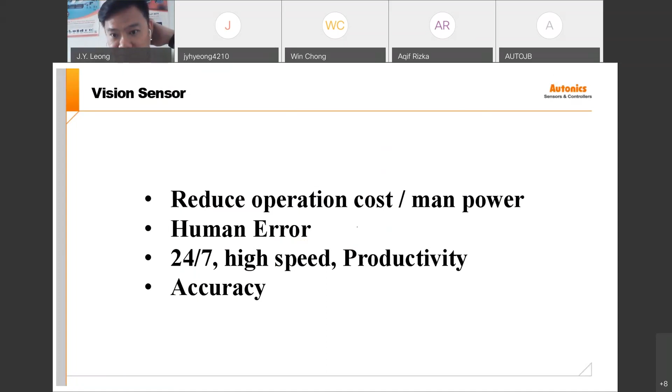Alright, so this is what we need to highlight - the purpose of the vision system. First, once we set up, a complex inspection process can be simplified - you only need to do the setup one time, then you can run it. The second will be precision inspection is possible.

Just now what I was saying, if let's say the object is very small and requires precision, you can also do it very well and get a very stable checking result. And reject can be reduced, of course, because of this high accuracy - that means you also can get very little reject.

And then cost saving, yeah, this is only one time - maybe today you purchase our VG sensor for maybe 6,000, then it's just a one-time payment that you can use. Okay, all right.

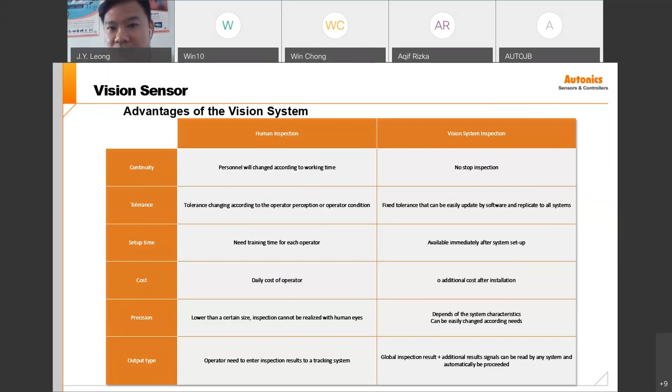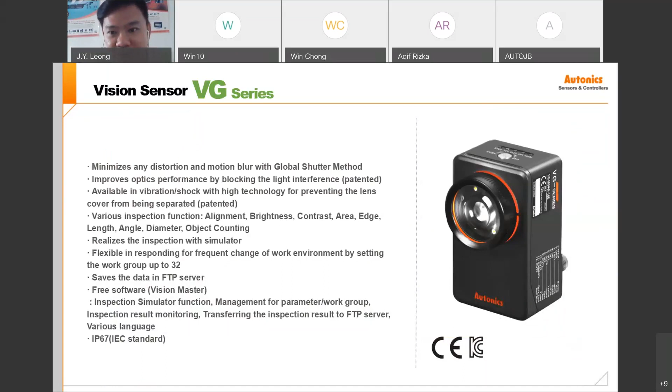Next we start to introduce our VG series. Mainly our VG series has two models - one is monochrome, this one is monochrome, and this one is color. It's easy to identify because the monochrome one has 9 inspection functions, and the color one has 12. The main difference is color differentiation - the function of color differentiation, or easier to say, is a color inspection system.

So we'll zoom in further. This is one of the on-site pictures for our VG-C series. For your information, our VG series has built-in lighting with this output, supporting both NPN and PNP transistor output, and you can set the trigger by sensor, by encoder, or continuous trigger. All of this is inside this unit - you don't need to assign another PLC to do the control.

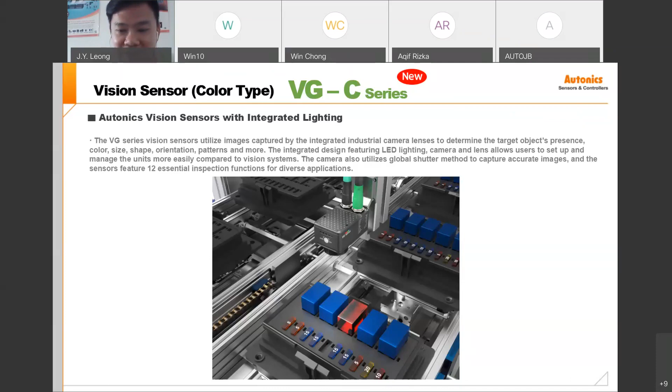Alright, let's look at our specifications in more detail. Our VG series is designed using a rolling shutter, not like previously the global shutters - sorry, had some mistake here. We are applying a global shutter, not rolling shutter. Sorry again, too fast, so there was some mistake here. Alright, we are using global shutter for our VG series.

Previously, the models we used had rolling shutter - if there's a fast moving object, there will be blur, which affects our inspection quality. So right now we are using global shutter, so for fast moving objects, there will be no blur. You can check this sample picture. Next is what we call work groups, or in words you're more familiar with, a recipe.

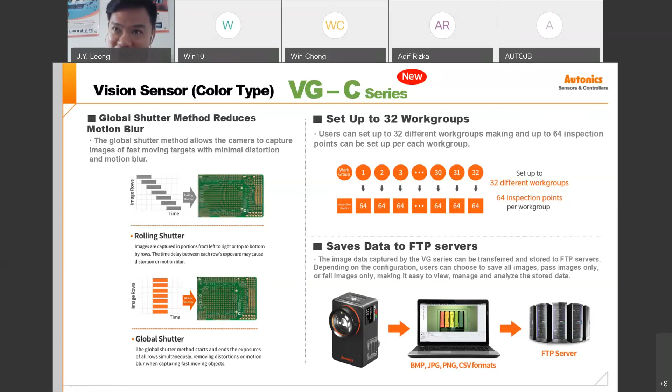So our VG series supports FTP server. So you can do some very simple minor setup and then you can transfer your data to the server. This is the function that I really like, because they can do a lot of things, like you can monitor the result, you can monitor the operator, you can monitor the production.

Okay, so we talk about the specification here. We have three focal lengths: 8mm lens, 16mm lens and 25mm lens. Of course, the working distance is totally different. Later on, I will share a very clear picture to show you the focal length, and how you do the selection between 8mm, 16mm, and 25mm.

Okay, so our power supply is 24 VDC, current consumption 1 ampere. So for the image element, we are using monochrome CMOS for the VG, and color CMOS for the VG-C, which is a color model. So the resolution here is 752 times 480 pixels, that's equal to 0.4 megapixel.

So the camera speed, camera frames per second, this is the camera capture speed, it's 60 frames per second. You may ask, what is the speed for your camera? I can only tell you it's 60 frames per second. But if you are applying checking criteria where the process speed is longer, then it will affect your checking time, total checking time.

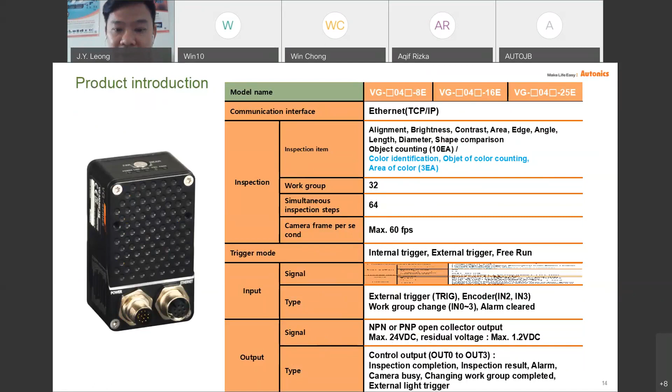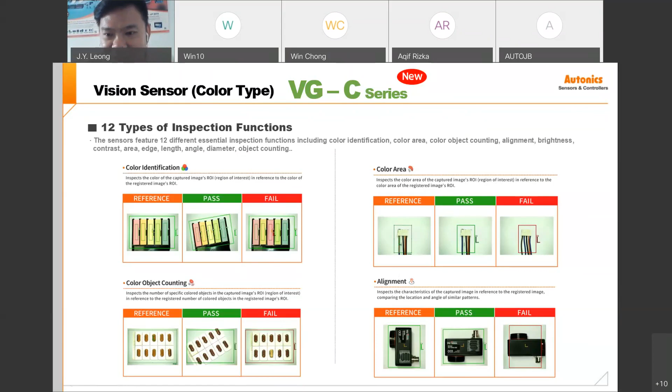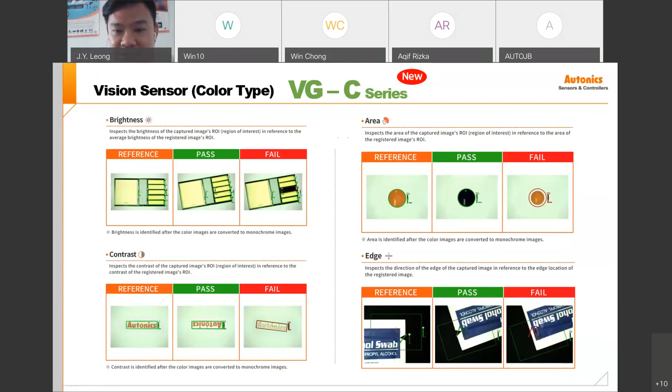So the diameter, of course this one is very straightforward - if the diameter is different, it will be triggered. And then this one is the length, you can see this so-called connector - if the connector is a different model, is short, it will trigger a fault signal.

And then this, if the pin is missing - or this function you can apply for those motor caps, is the cap sitting properly, it also can be detected. And then the last one is object counting without the colors.

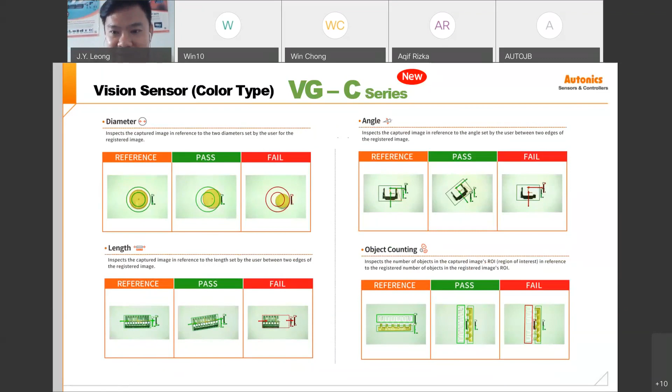So this next is I'll touch a bit on our Vision Master, our checking and setting software. This software, I would like to highlight, is free. You can download it from our website, and then it will automatically update. Even though you don't buy our VG series, you do have access.

They have one simulation at the right hand side, and then if you connect with our unit, it will be complete - complete for, like, you want to do the imaging setting, you want to do the output setting, or so on. So later on, Mr. Shahidan will explain more in details.

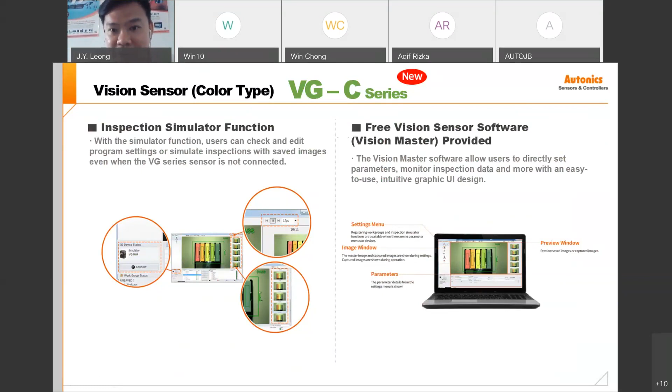So yeah, of course we have this filter also. This filter is majority for some special application. I want to highlight, if you have a very high reflection object, you can apply the polarizer filter to cut out the reflection, then you can get a much better, stable inspection result.

And then for the protecting structure, it's IP67 - that means it's weatherproof, dustproof. Right, so this is sharing some of this application for our VG series.

So for the food industry, if the seal is not good, that's detected, and the bottom side checks the expiry date. For automotive industry, the right-hand side shows the fuse box example I shared earlier. If you insert the wrong fuse, it will trigger a reject, saying the fuse setting is not correct.

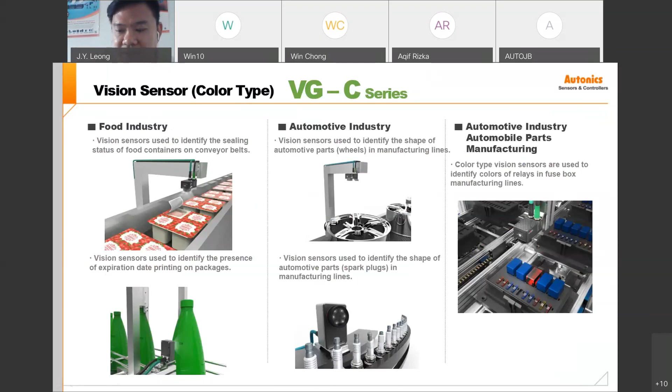For pharma, we also can do inspection because some pharma applications have special requirements, like checking water or medicine levels. This one on the right-hand side is the same for the medical equipment industry.

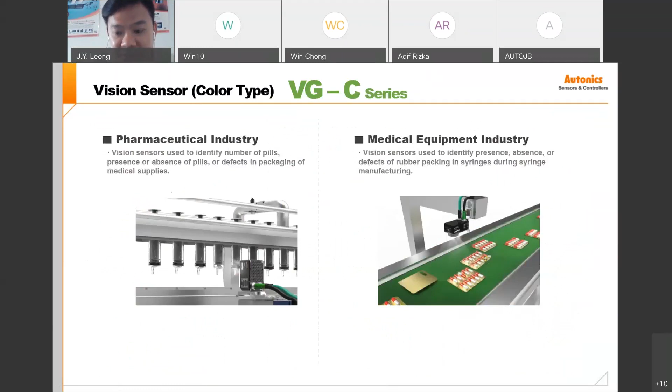All right, so I'll have a quick view of our Vision Master before we go to our successful story sharing.

This is our initial screen for Vision Master, a very user-friendly software. You just plug your cable into the PC, turn on the software, and it will automatically link out. When it links out, you just press OK. After that, if you want to change the IP, that's also fine, or you can go directly to setup.

This is the simulation for our software. Every time a new user installs this software, this is the simulation we provide, so you can go through the module, toolbar, setup menu, image window, and so on.

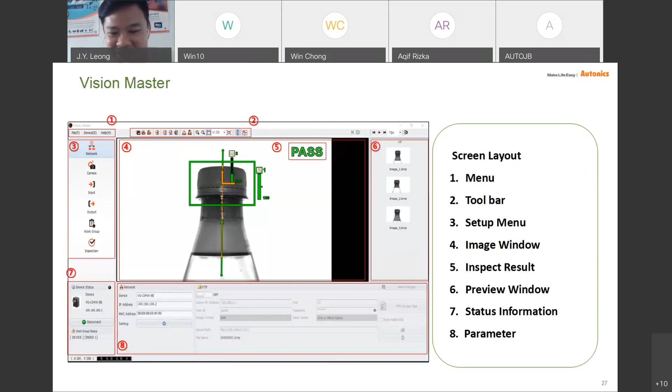So this is our step-by-step process, let me explain in more detail. First, you connect with the network. Then next, you do the camera setup to get a very clear and sharp image for teaching or setup use.

Then next, you do the I/O setup - is it NPN or PNP? I'd like to highlight, if there are 4 outputs, number 1 and number 2 are NPN, number 3 and number 4 are PNP. We cannot mix them - if it's PNP it must stay PNP, if NPN it must stay NPN, for both output and input.

Number 4 is our workgroup setup. Of course, you need to do the inspection criteria setup, and then after that you need to set for this.

Maybe you have four outputs and you want to separate them - reject 1 and 2 could go to output number 1, reject 4 and 5 could go to output number 2. You can configure it like that. After that, you just click start, run, and then we can do the inspection work already.

So here is our section for successful story sharing. I will share 3 of our successful stories here. Everybody hold on.

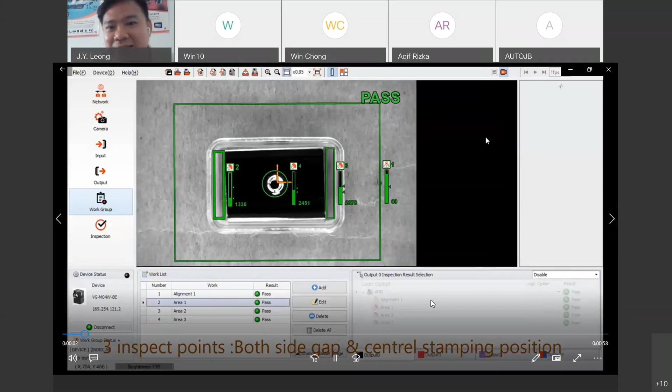Next, this one is the stamping. You can see right now the middle one is double stamped already, and this metal plate seating is not even, so it will trigger a fail.

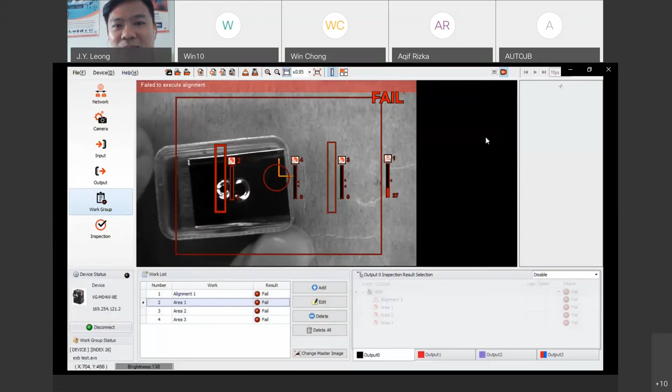So next I'll change to another one. Oh, this one is worse - the seating is totally out. You can see it triggers a fail. All right, so next.

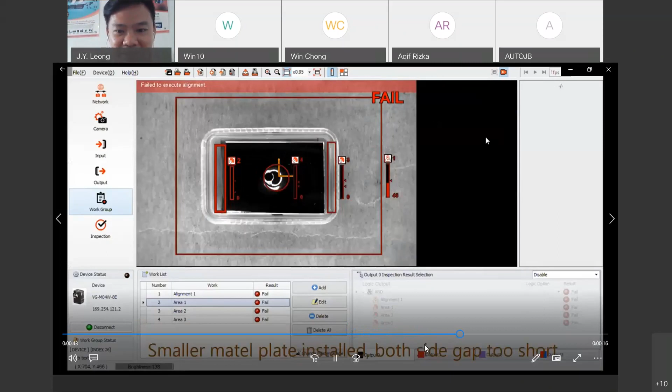Okay, this one is double stamping at the middle, and then this metal plate is totally very small. Left and right, the gap is not the actual size. So at last I put back the original one, the okay one, and then yeah, there's a pass.

All right, the next video has no sound, only my sound explanation. This is I think very familiar to all of you. This one is a SAJ project, this one is the meter. The customer would like to do this alignment. This alignment, not three is okay, but must be in one line. But if let's say it's 4 3 3, okay, 3 3 3 4, okay. Let us see.

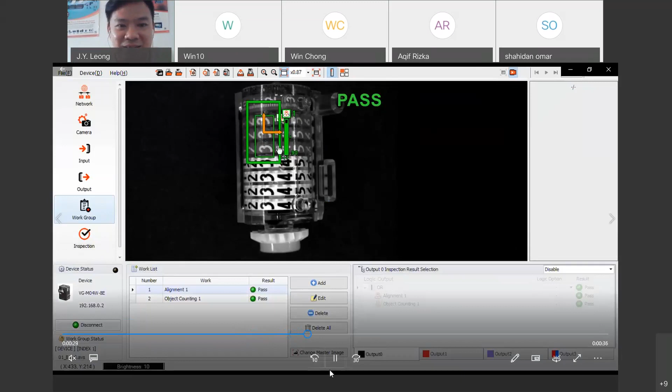So this one, unfortunately, I do it by hand. This is a testing on site, so we don't have the proper tools to turn. Later on, I just turn with my hand manually. Okay, so now it's misalignment already, so it will trigger fail. And then 3 4 4 3 3 4 is also okay.

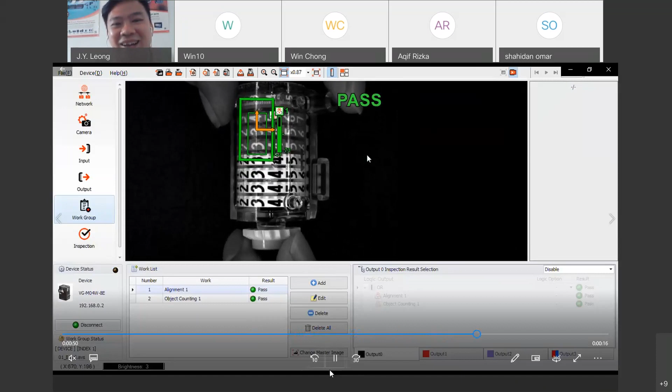Okay, thank you. Thank you.

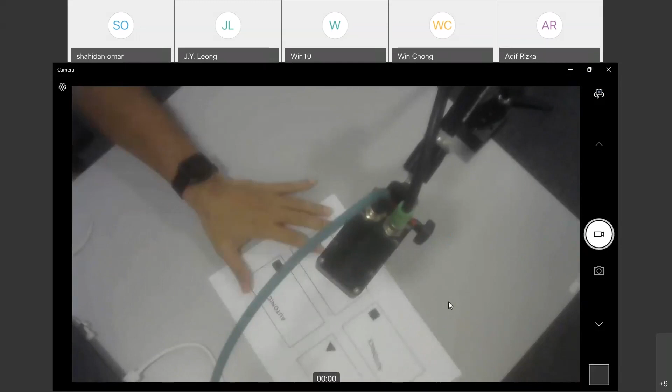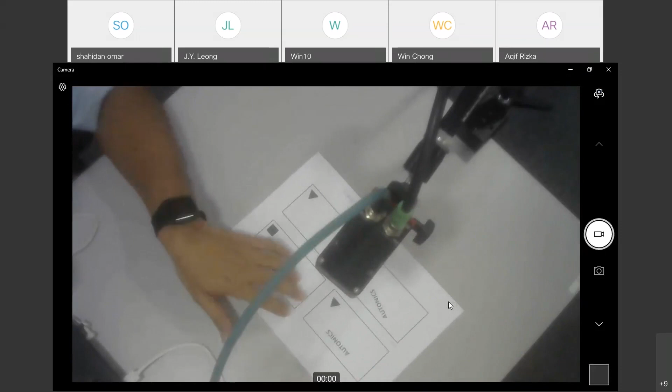Okay, I just install the vision sensor to detect this paper, white paper. So on the paper there's a simulation inspection product. Okay, so this one is an Ethernet cable which I use to communicate with my PC, and then this one is a power supply for the vision sensor.

Okay, now I stop sharing my installation method. So actually from the paper to the vision sensor, I install around 200 mm, 200 mm. So you can get the field of view that Mr. Jawad already explained, which is 100 mm wide width, and then the height is around 70 mm.

Okay, now I will share with you our vision sensor. Okay, everyone can see the vision sensor. Just type 1 in the chat box. Okay, thank you.

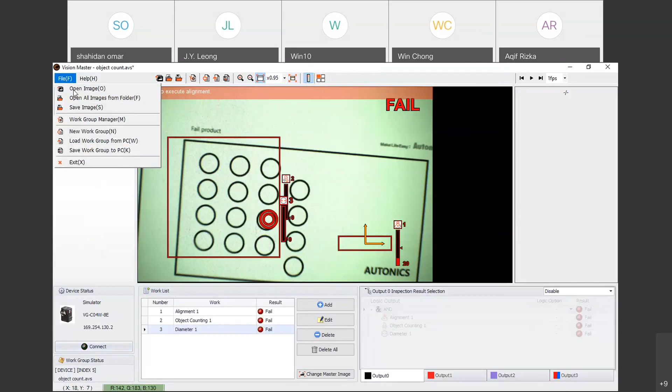Now we continue to show our vision sensor. Okay, first I disconnect this one. Okay, and then I connect back. Okay, this window will pop up that shows my computer already detected this part number, this version of the VG sensor.

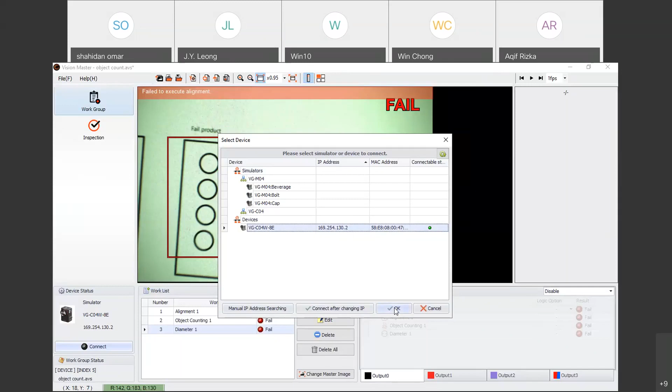So now for my demo, I use VG-C04W-8E. C is a color type vision sensor. So if mono, it starts with -M. Okay, you can see the IP address is already automatically assigned for you. After that, you just click OK. Okay, you can see this green button means the connection already succeeded.

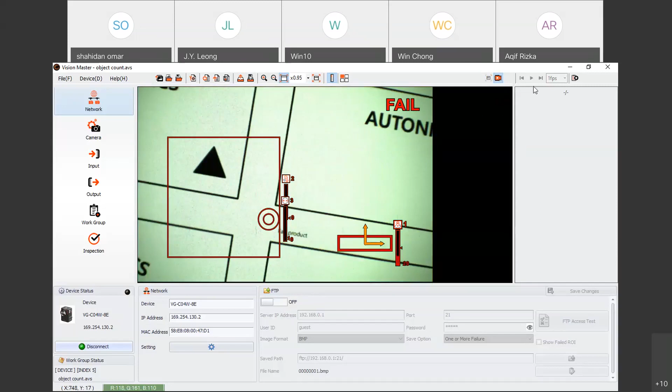Okay, after that, this one is a continuous snap. So if you want simulation or to do a demo, you can turn on this function, continuous snap. I try to move this simulation inspection paper to the center.

Okay, let me explain these features of our vision sensor. Now you can click, you see when you click this file, you can see the open image option. This means by offline testing you can inspect from the picture that you have already taken. So you can select the picture and then do inspection offline.

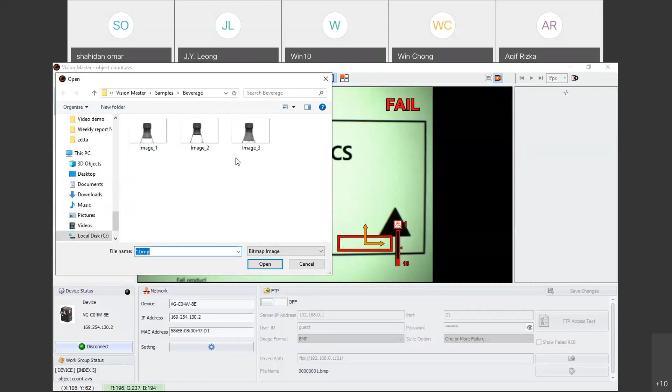After that, you can create a new work group, and also you can load the work group from the PC. Let's say you have already saved your setting, and the device is not enough, only supports 32 recipes. You can save the work group inside your PC as well. This function, in case you have more than 32 work groups, you can call the work group from your PC.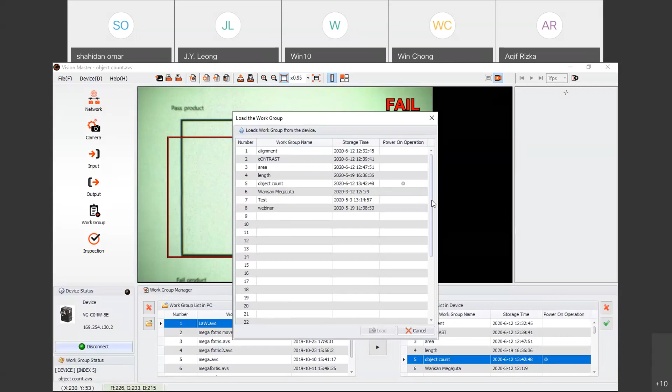And then you can load work group from the device. Let's say you want to change the recipe, you just select which recipe you want to use. Okay, so you can save, and then okay.

The second one is the device, this one is an IO test. This function checks if your hardware wiring is connected okay or not. You can see if your connection is okay, the status will turn green color. You can check the vision sensor input, which got trigger input 0, input 1, input 2, and input 3. Also the output. So if your wiring is NPN, you no need to change. If your wiring is this one, you can turn on and turn off to do the simulation.

Also have a firmware update. For this pop-up window information, firmware of the device already updated. So if your firmware is already updated, the pop-up will show that you already updated. This is the latest one.

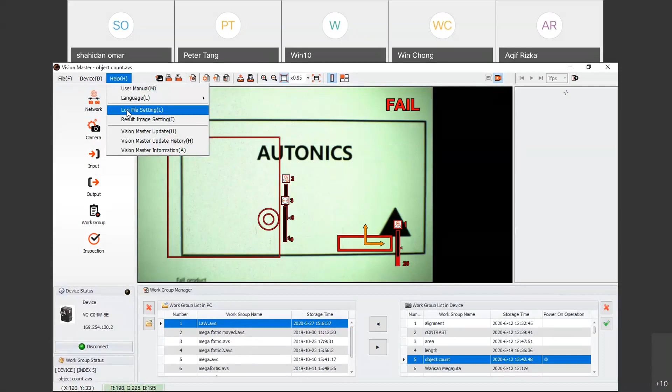And then we also have a log file setting function. Okay, go here and then turn on the log file save. You can choose which folder you want to save the log setting, and then you can just increase the volume.

Also result image, you also can save the result image on your PC. Just turn on this result image function, and then you can save in BMP, PNG, or JPEG format. Also includes separate saving paths. Means you can separate the pass image or fail image in the same paths, or you can have pass image and fail image in different paths. I mean, in vision master we create two files. One is a pass image and one is a fail image.

Okay, all the information update you can see, what our HQ does to improve our software. You can see the history for this software. Okay, have already finished, this is just information. Which version, which is the current version. So in this box, shows Vision Master version 1.1782, and the compatible vision sensor software is 1.139.

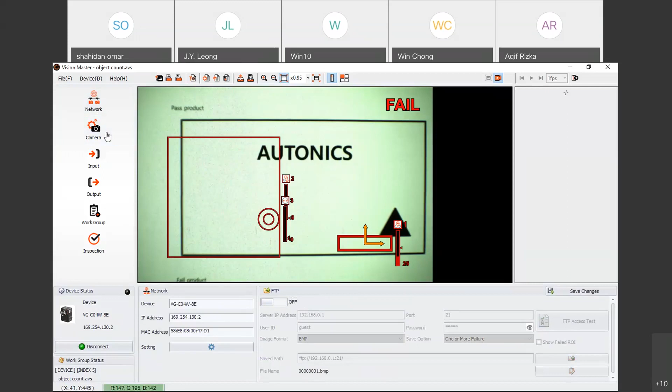Okay, and then we go to the camera. Okay, I need to clear all the history, last time I already did some inspection. Just delete all, okay, create a new inspection.

Okay, for the first setting, you need to set up the camera first. You just click camera, and then you can control the exposure time. This setting you can do is exposure time setting, then exposure delay time setting, also gain setting, and then light setting. If not enough light, you can turn on the internal light.

Internal light, okay. And then you can also adjust the focus, you can monitor the focus of your sensor. Actually, our sensor, you need to adjust the focus manually, just by the plus screwdriver.

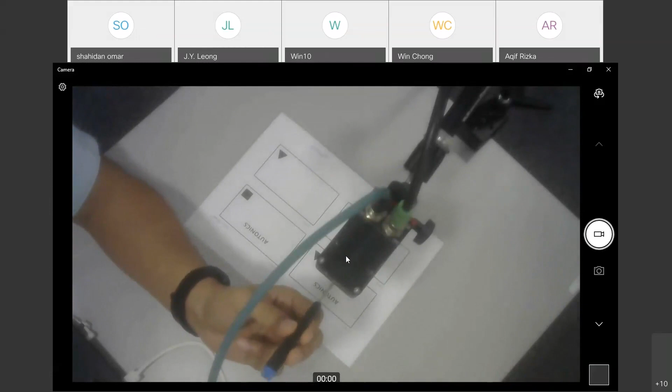Let me show you the camera again. Normally to adjust the focus is in front here. There's a focus button, focus VR, which is near and far. Okay, we go back to the vision sensor.

Okay, after you adjust the focus, try to adjust the focus here. Okay, now the focus is blur, you need to adjust manually. Okay, you can see the yellow indicator. I try to adjust near until the yellow indicator increases. Okay, now increase, the focus is more better.

Okay, and then we can start the inspection after we get the good image. We go to the work group.

Okay, for the first inspection, I would like to share is alignment. How our alignment functioning. Okay, first we try to adjust the image first, the center.

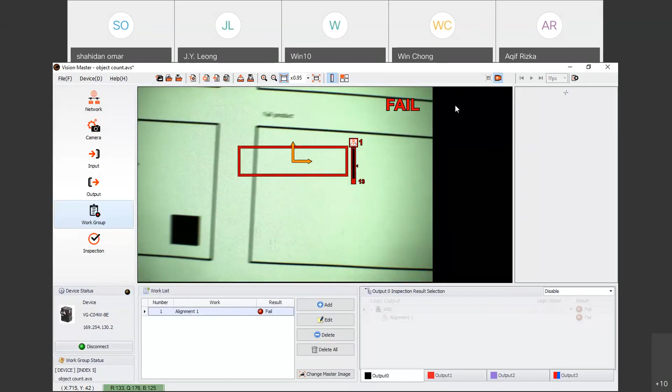Okay, now I move to the next picture. Still detect the Autonics because I already assigned the alignment. And then I move to next picture, no alignment detect because no Autonics words. Then to the next, okay, this one still detect the alignment. Okay, for the alignment, normally the first inspection you need to do is alignment.

After that, you can assign another inspection. Let's say for example, I put here shape comparison. Okay, we assign this shape, triangle shape.

Okay, for the inspection, you can select rectangle. If rectangle is a rectangle shape, if you select polygon, you can do the shaping. You can follow the shaping of the object.

Okay, you can make a triangle as well. After that, just push automatic teaching, and then press OK. Okay, now we try to check.

Okay, now the vision detect NG because alignment actually straight, but this Autonics words little bit slanting, so that's why it detects NG. We try to move to OK image. Now it's OK. The reference image is OK, the pass product. And then we try to next.

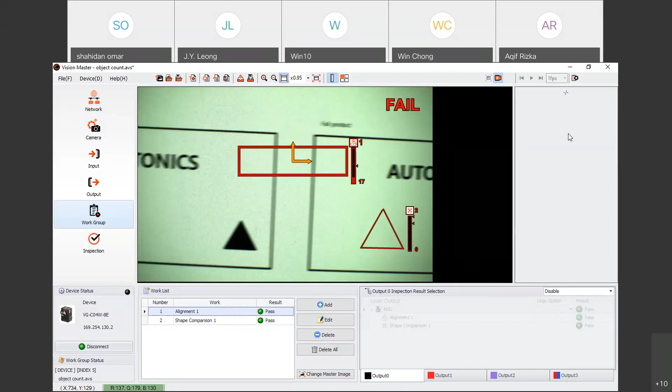Okay, now it's NG because no triangle. No triangle. No alignment, so the vision will detect fail.

We go back to the pass image. Okay, alignment already finished. So the next I will share is for contrast.

Simulation paper. Okay, try to center first. And then one more time, we're teaching. Okay, first assign alignment.

Oh, sorry. Okay, first you need to remember to change the master image first, because this is a new inspection, so we need to change the master image. You can do this continuous snap, or you can also snap the picture to get your reference object, meaning the good image. First you register the good image by changing the master image. Okay, yes.

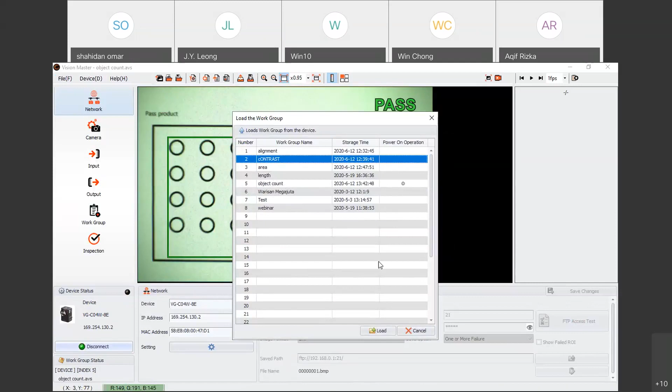Okay, now I use load work group from device. So just now we test contrast, so I just load the contrast setting. Okay.

So now I do two inspections for contrast. The first one is to detect the triangle, and then the second one to detect the Autonics word. Okay, got three inspections: first alignment, second contrast one, and third contrast two to detect the Autonics word.

Okay, we try to do simulation. Press continuous snap. Okay, because just now I already changed the setting of the camera, so I try to load the previous setting, so it cannot. We try again.

Check the, delete this one. We try to set one more time for contrast.

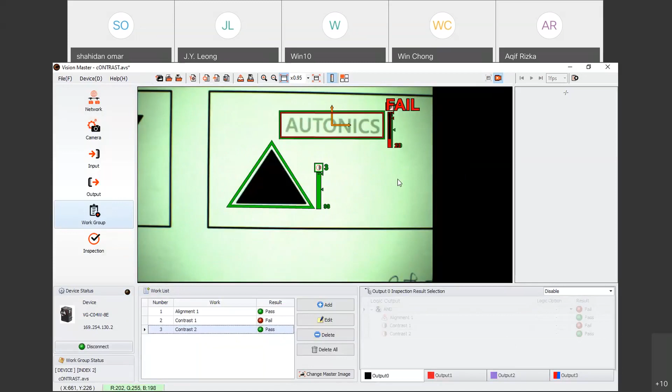So now it's okay, just adjust the tolerance for the brightness setting. Okay, we go to the next. Oh, 99, can this one change back to 90.

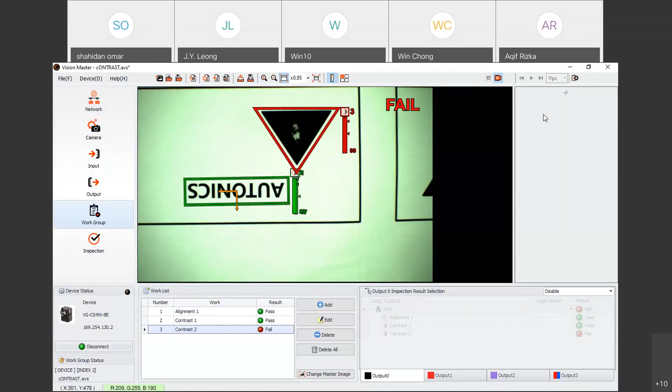Okay, now already failed, so only one is okay, the rest is not okay. So this one got problem with the white color inside the image.

Okay, finish for the contrast, and then we try another inspection.

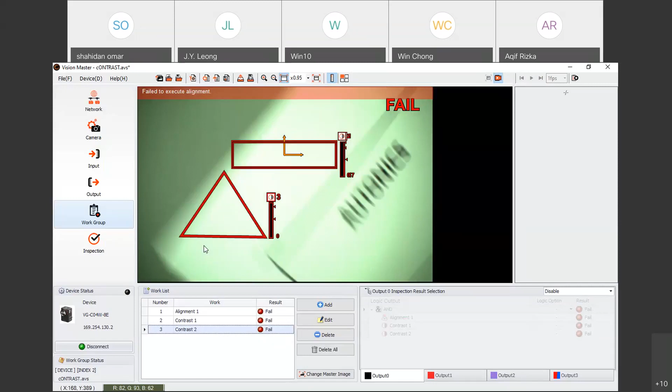Okay, this time I will share the area inspection. First we teach the good image for area inspection. So I will clear all.

Then we just click add for alignment. Oh sorry, I already forgot the step. You must remember to click this, change the master image.

Okay, we teach for area. Press add. Make alignment reference first. And then for the circle black color here,

I will use area inspection. This one is circle, so I will choose a circle. Okay, you can adjust the circle.

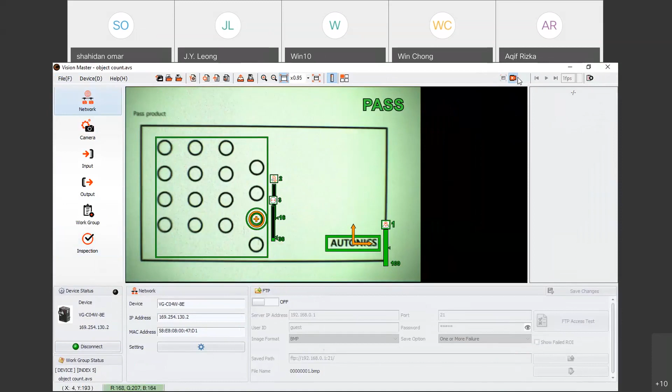Master image, and then we assign the alignment. After that, we continue to area.

Just now I show you bright on dark. So actually for this it's suitable to use dark on bright because we focus on the black circle object. And then you need to focus the black, so you need to adjust the binary threshold here

until you get the black. Okay, now already turned to green, means the image is okay. If you want it more fine, just adjust. After that, click OK, and then we start inspection.

Okay, we go to the next image. Oh, this one is okay, because the Autonics word, the O is not okay, but I didn't assign the area. So if you want to detect whether this Autonics word inspection is okay or not, you need to assign the area inspection for Autonics word.

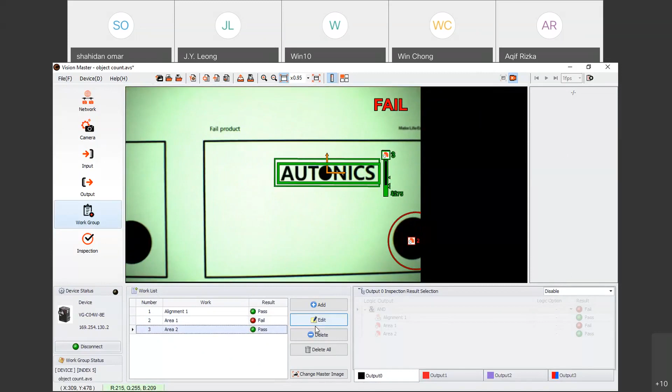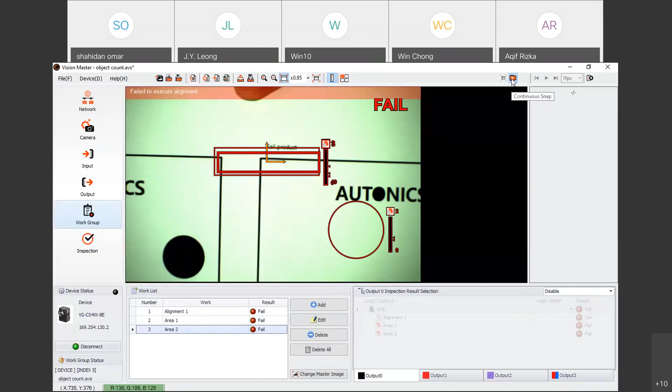Go back, so edit, and then we try to lower down the binary threshold. I think we need to increase the threshold.

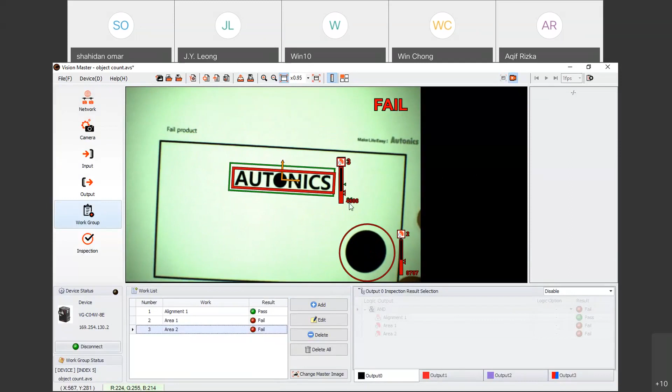Or you can see the value, the value is different. So now we get for area inspection for Autonics is 46885. The okay ones are 4400. This one is a tolerance you can adjust.

If not satisfied with the inspection, the image is actually NG, you need to adjust the binary threshold. Actually, the effect of this is because of the light. Maybe there's light interference, so you can lower down the binary threshold, or you can increase the binary threshold, depending on the inspection you want to set.

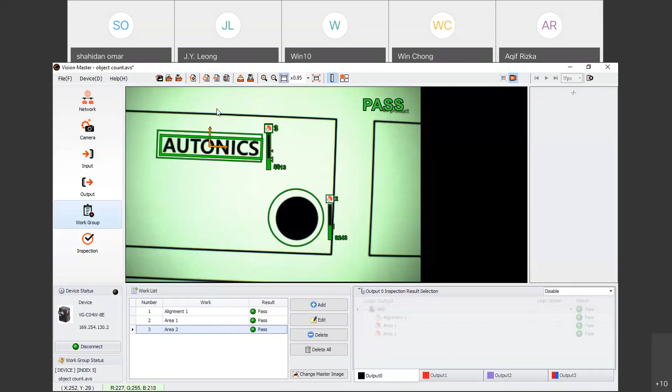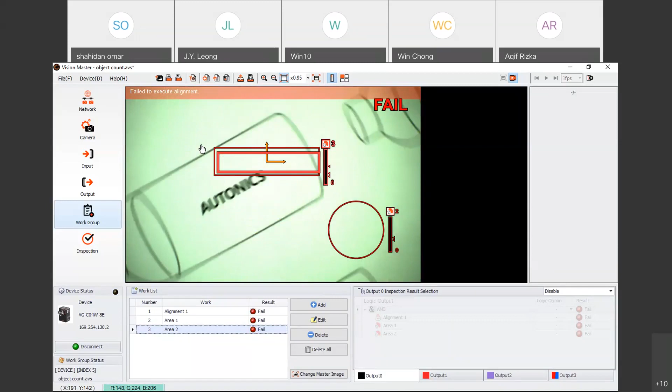Finish for area inspection. So next, I will share the length inspection. Now we have like a bottle to detect the bottle.

First we delete all the previous inspection, then register as a master image. Change master image, and then yes. After that, check for alignment. Automatic teaching, and then press OK.

Okay, now for this bottle, maybe you want to measure the length of the water level. So what you can do is first check measurement, and then choose length. Measure the length between the two edges.

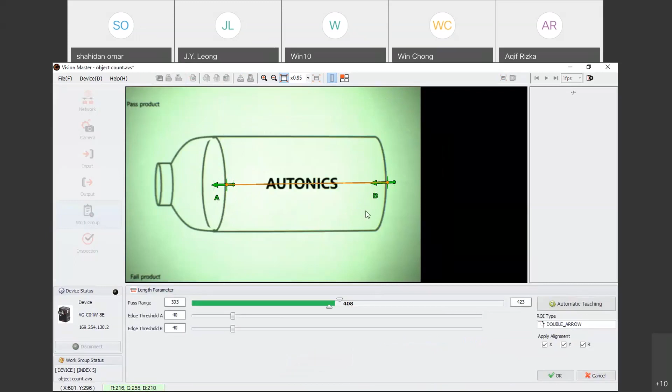And this one, let's say I want to reference this like the water level. So I will check here: the first reference A, and then the second reference B. Okay, after you finish A and B, this line will appear.

This orange line will appear to detect your current level. So between 408, sorry 393 is the lower pass range, and then 423 is the highest range. Okay, and got A and B threshold also.

Okay, then click OK. First the inspection of length, and then I try the second. I want to know this bottle width, bottle diameter. Okay, try another length inspection.

From here, this edge to this edge. You need to get a straight line. Let's say okay, here it's a straight line, and then click OK.

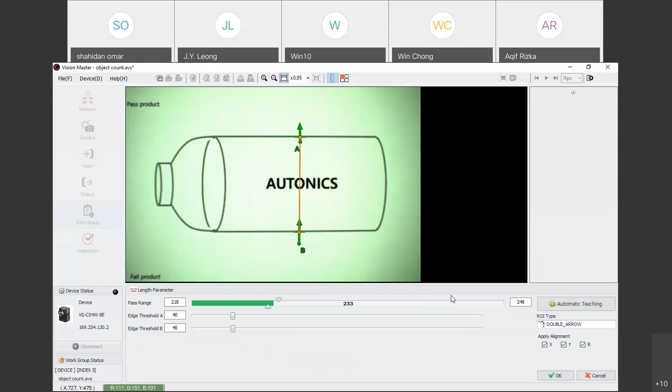Okay, second, I have a bottle width and then the water level. After that, maybe the bottle size, the cap size. Okay, we can try the cap size.

From here, upper and the bottom level. Okay, so you get A and B for the cap size, cap height. Okay, click OK, and then we try to inspect.

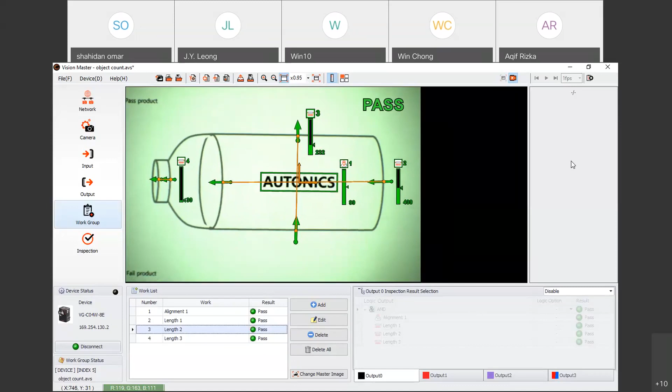Just press continuous snap. Okay, we try for the next image, the fail image. Okay, you can see here is the level 409. And then the OK one actually is a little bit different.

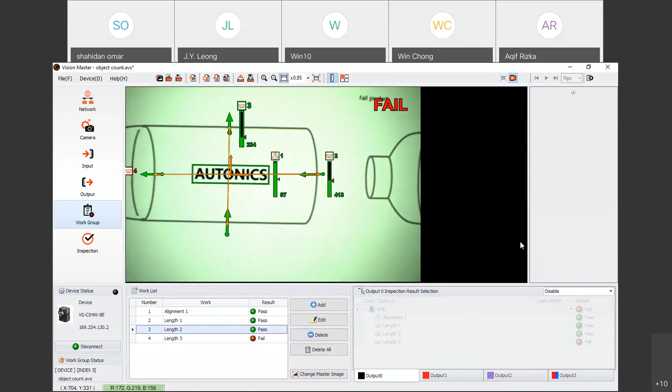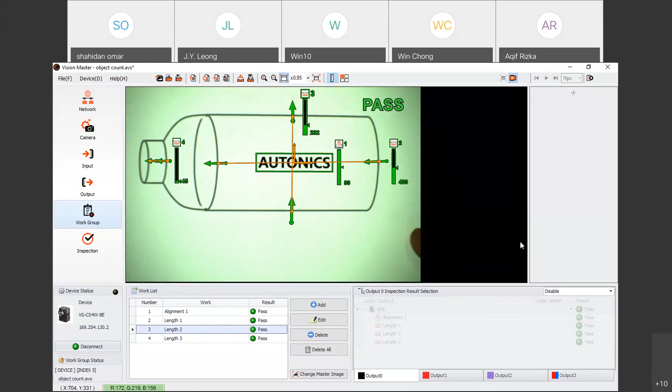Means okay, the level is okay, but actually the cap is not okay. Cap is higher. This one we get the reading is 45.

This one is only 2930. Okay, you can see the cap is inspection number 4. Because got a pass range from 16 to 46, so you need to adjust the pass range.

So I lower down to nearest, let's say 31. Okay, 32, I will give a tolerance a bit. Okay.

Now the cap's fail cap. You can see the cap is the sensitivity is 44, but the okay one is around 29 only. Okay.

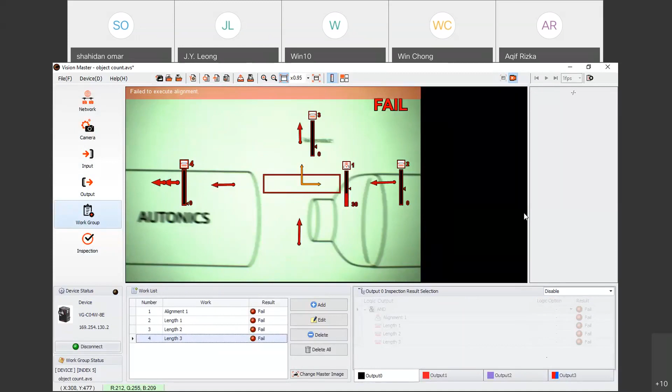Then we go to the inspection. This one cap fail, first cap fail, and then second. This one alignment cannot do because the Autonics word is bigger. So the vision we detect alignment not okay, so totally cannot do inspection.

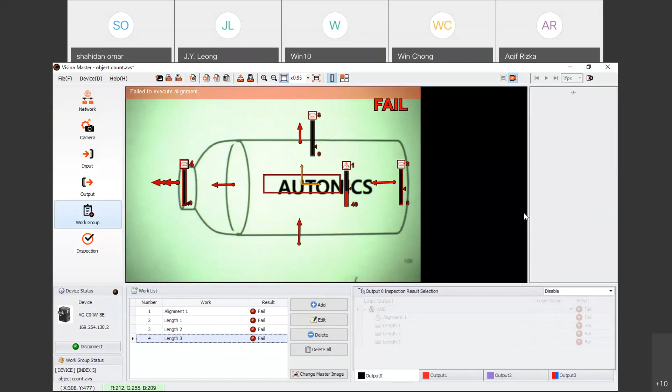Totally fail. Okay, then next, last image. Bottle cap okay, but the width is not okay, not satisfied the width. The bottle size is smaller. So the vision sensor we reject.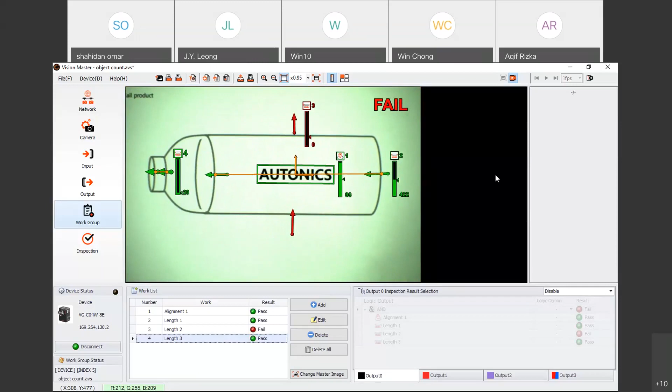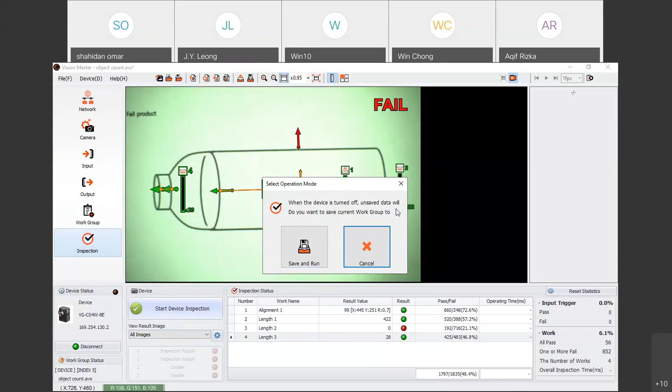Okay, after you do this inspection, after finish inspection, you just start device inspection. When you click the start device inspection, a window pops up asking you to save and run. When the device is turned off, unsaved data. Okay, so you click save. When you click save, the window will pop up the device workgroup.

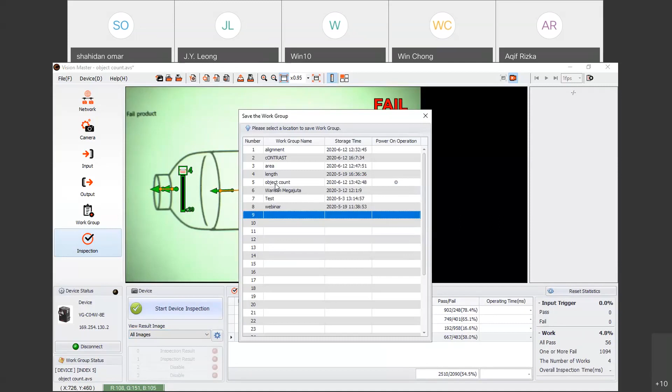So you can save the inspection that you have already done, let's say you want to save here. Let's say you want to save the length. Okay, length, just override. Just save.

Inspection image in full mode, so if yes, the window will pop up the full screen mode. If no, it's like this. Okay, I say yes.

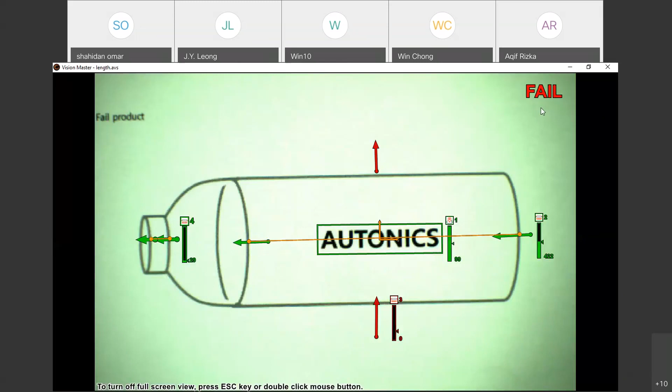Oh, this one is a real inspection. So now the vision will already do the inspection. Okay, you can see stop device inspection. If you click here, the inspection will stop.

So now, real inspection, the image you can select. You can disable image, you also can only pass image. Because this one is a fail, so no pass image, already failed. Okay, you can view the failed image only.

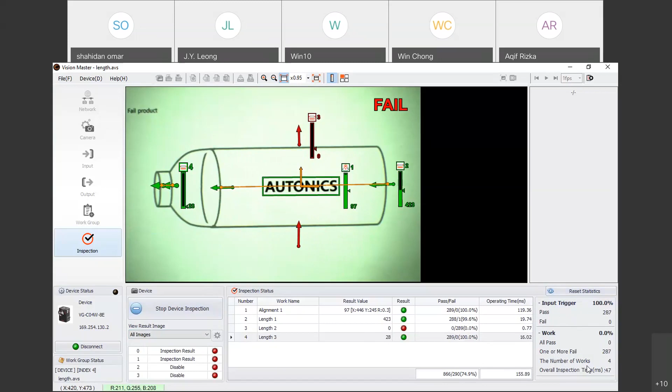You can select selectable here, all image. Okay, so the result you can see here, the input trigger, one or more fail, the number of works, how many works. Okay, now fail image, we can try to switch to okay one.

So you can see here, all pass. So the value is increment. Okay, actually,

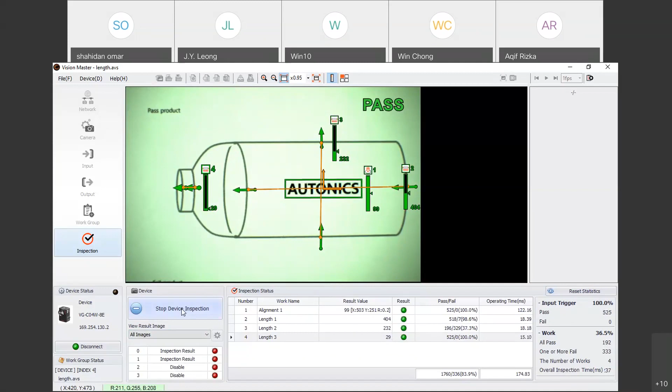to start the okay, when you already set up all this, you don't need to connect with the PC. So you already program the vision sensor to follow what you already registered, the inspection that you already assigned for the work group. Okay, after that, stop.

Okay, the last one I want to share is object counting, object counting.

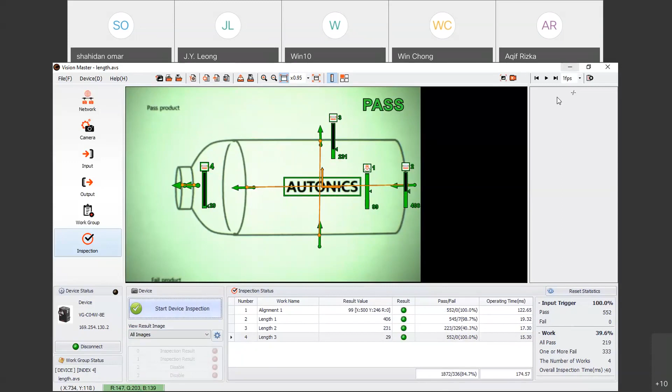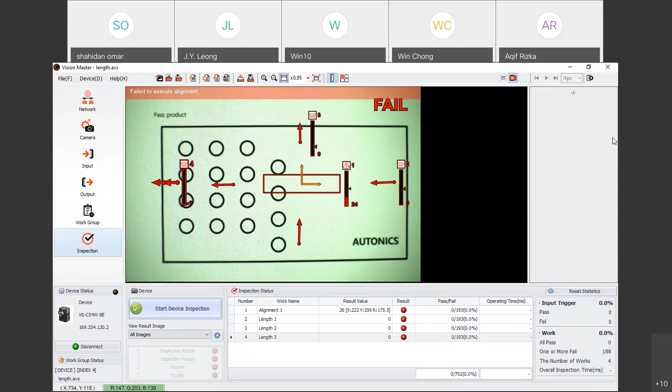Okay, first we get the center point. Go back to work group and then delete all. After that, you can start to continue snap or just one snap. Okay, then change master image.

Okay, we add two for alignment. Then press OK. Okay, add, and then we try object counting. Okay, let's say this, you want to check this area.

Oh, okay. So the object counting already detected got 16, 16 circles.

Okay, now the binary threshold is 137, and the area filter threshold is 100. You can check here — if you adjust the binary threshold, some of the circles won't be detected. So you need to get the correct one. The first time I assigned it automatically, it was okay, no need to adjust anything. So 137, just click OK.

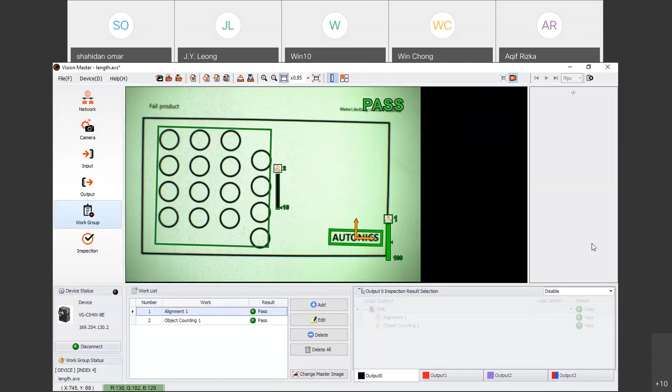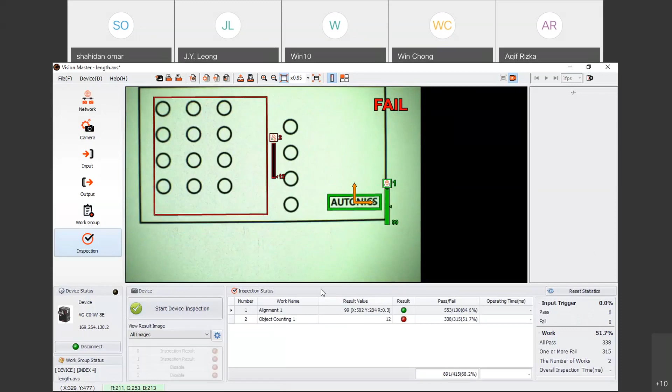Okay, after that we try to switch to another image. This one — detect how many? The reading is not okay, only 13. Only 13. Okay, the last one — in the inspection box, only 12.

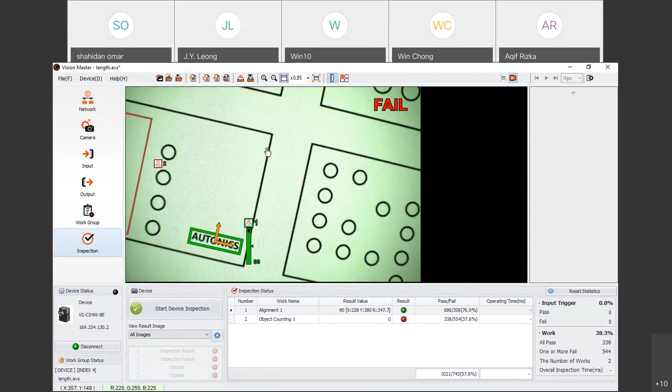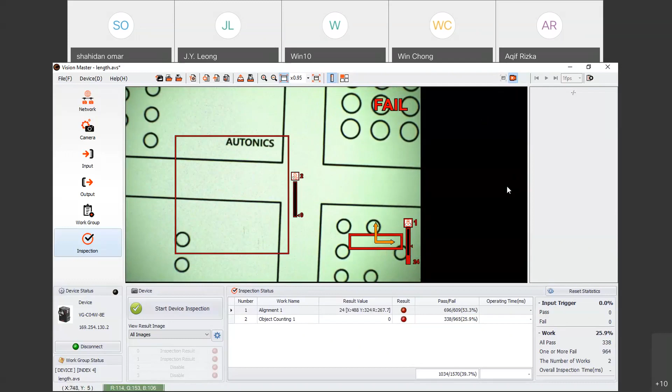Okay, I think this is the last sharing for the demonstration section. So if you need more demos, and if you have a product to inspect, you can call us — call our salesperson, call Mr. JY in JB, and I am also in support in Klang Valley. Also, if you have a product you want to test in Penang, we have another contact. Okay JY, I think that's all for my part, the demonstration part. So now I will pass back to Mr. JY.